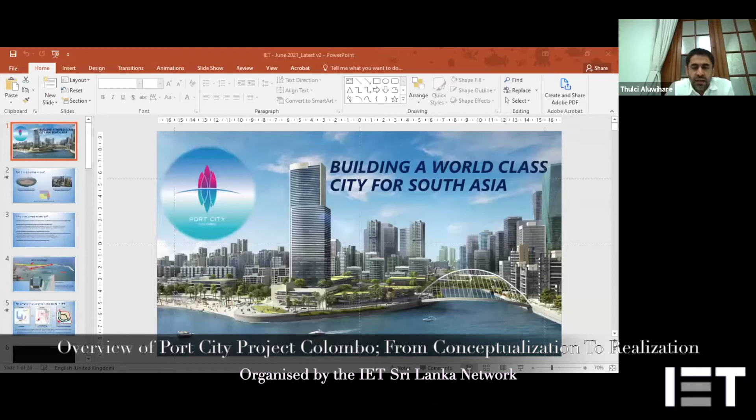So let me now try and share the slides with you. Can you see my slides on the screen? Great. So, building a world-class city for South Asia - this is really our vision.

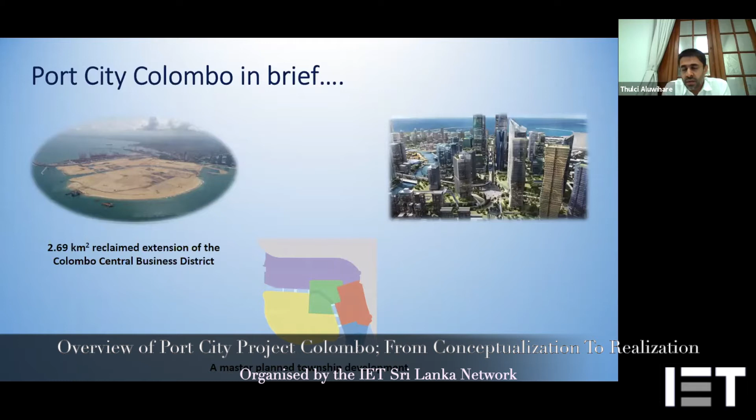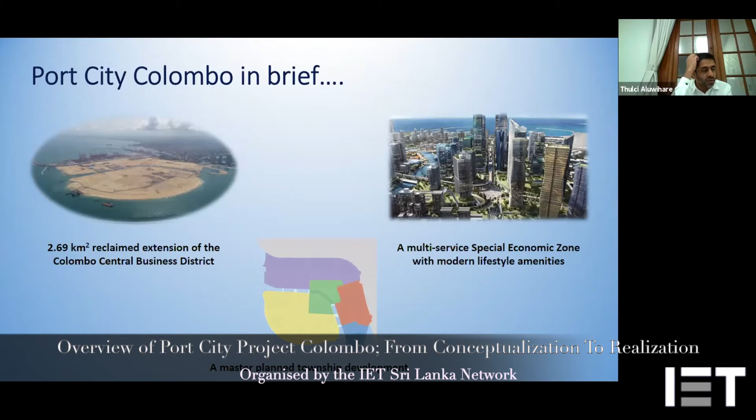This is Port City Colombo in brief. It's a 2.7 square kilometer reclaimed extension of the Colombo central business district. The whole 269 hectares of land is divided into 5 precincts, color coded, each resonating a different development personality. It's the first master plan township development in Sri Lanka - a multi-service special economic zone with modern lifestyle and amenity. The framework law for this was passed in Parliament and got certification by the Speaker last month. So now we are really ready to do business. I will discuss this a little bit more.

The next question is, why a reclaimed extension? As you all know, high quality real estate is crucial for businesses, investments, and to drive tourism demand. Now, if you take Colombo, due to limited land availability, doing a real planned city was a huge challenge. As you would know, land acquisition takes a long time and is a very costly affair.

Hence the option of reclaiming land from the sea was mooted much before the 2013 reclamation started. Reclaiming land from the sea and developing planned cities by the sea is not unique to Sri Lanka - many countries have done this over and over again. Some examples Dr. Lalit mentioned, like Palm Jumeirah in Dubai, are quite famous for this type of development. This is the first time Sri Lanka has reclaimed land to develop a city. We have done reclamation works to develop ports, but this is the first time we've attempted to develop a city.

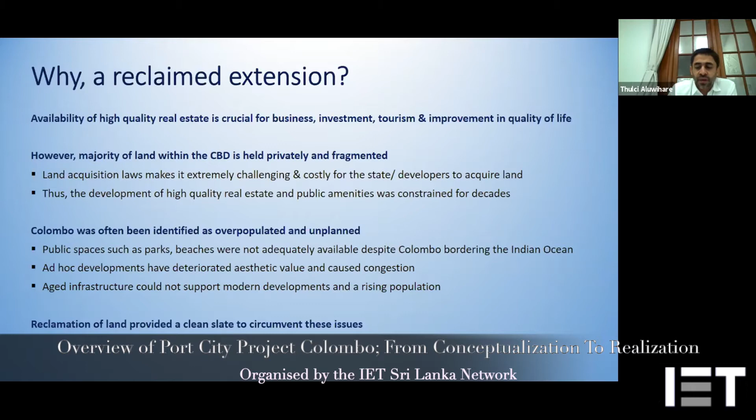What you can see here - let me move my cursor - this is the South Port development, that's a terminal. This breakwater was developed commencing in 2007, about 5.2 kilometers long. And if you look at this South terminal, there's about a 2 kilometer width here. So the Port City reclamation was really anchored to the South Harbour development project, and it made the project more feasible simply because this breakwater was already in existence.

Generally in Sri Lanka, the sand or sediment accumulation moves from south to north. Because of this South Port breakwater, a certain amount of sand was anyway accumulating there. Just to give you context on size, the South Port reclamation consists of about 820 hectares, compared to Port City which is about 269 hectares.

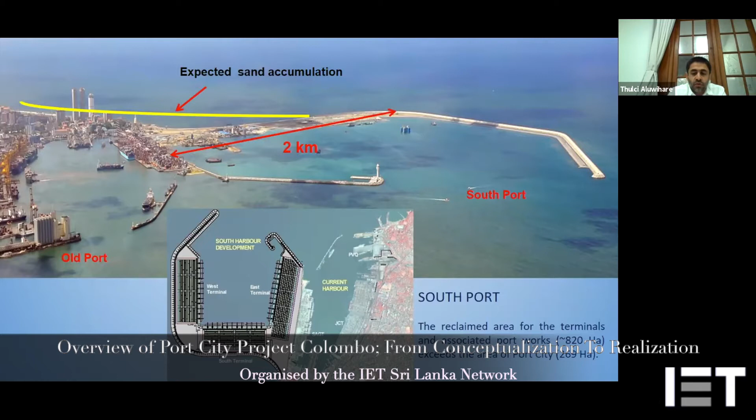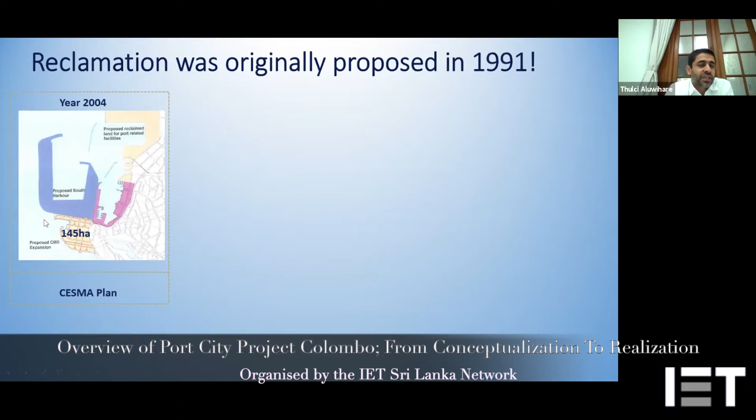This reclamation idea was conceived way back - initially a Singaporean company called CESMA proposed this in 2004. If you look at that chart on the left, at that time South Harbour was proposed with 145 hectares initially envisaged. That was in 2004. Then real feasibility studies and those conceptual thoughts were put into action in 2011, with initial technical feasibility studies conducted. At that time, the thinking was somewhere around 130 to 133 hectares for the reclamation.

This was subsequently increased to about 233 hectares. But what we've ended up having now is about 269 hectares, and that majority increase was actually due to an increase in public spaces - the parks, waterways, and beaches. So more common areas were added, hence the increase in land reclaimed from 233 to 269 hectares.

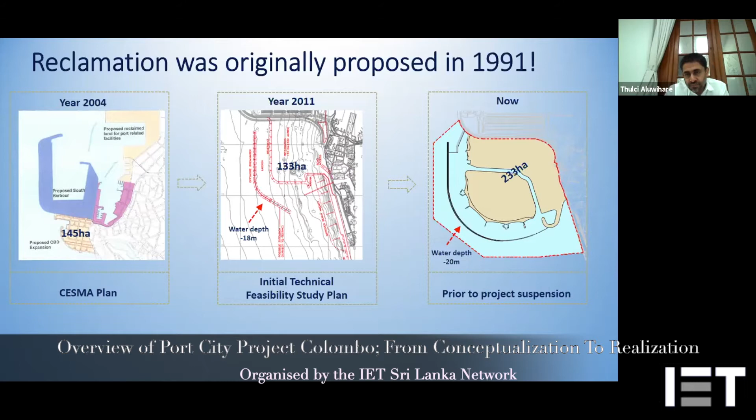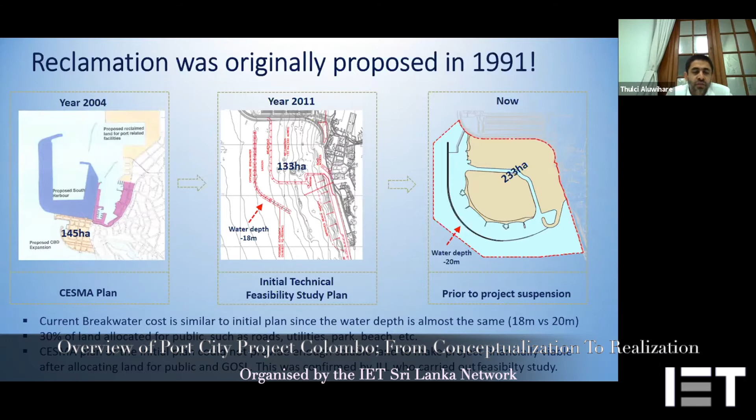As I mentioned, 30% of the land is allocated for public use. So 1/3 of Port City's 269 hectares is open to the public. This consists of parks, roads, beaches, and total green areas within Port City amount to about 27 hectares. Galle Face Green is about 5 hectares.

I want to play a short video now which will give you a description of how the reclamation process worked. I know most of you are engineers, so I'm sure you'll be quite keen and interested to understand this. Let me play this video, it's about a 4 to 5 minute video.

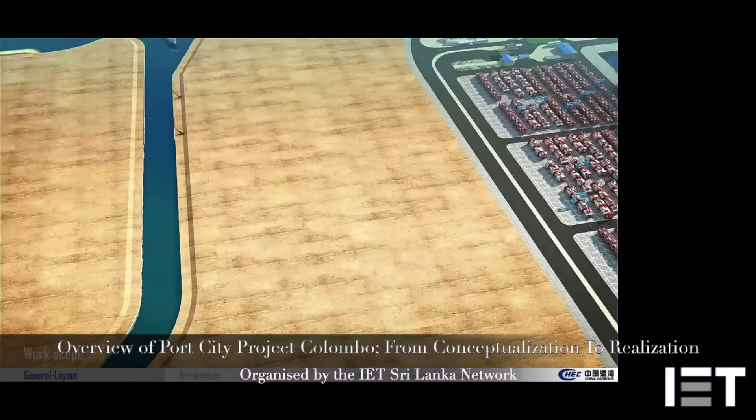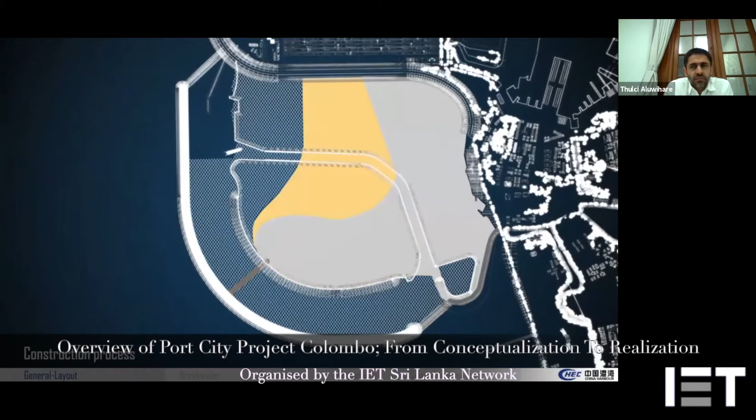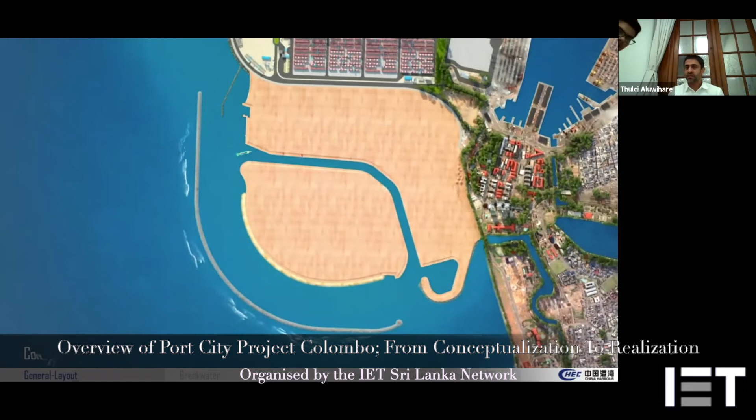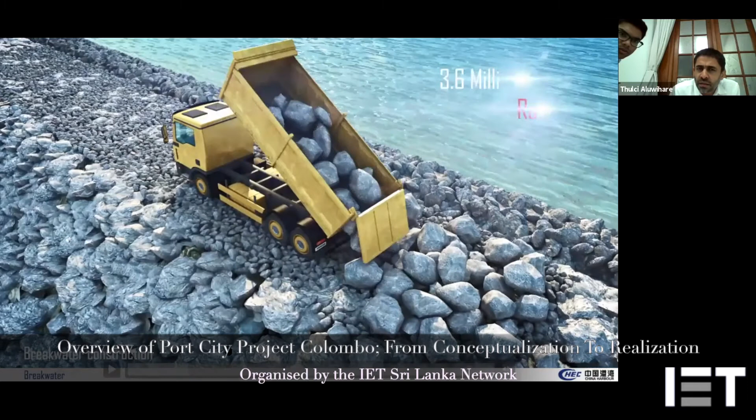Can you see the video now? Yes, Thulci. Lalit, you can hear the audio, right? No, no audio was heard. Wait, I think that's an issue. So audio has to be heard. Yeah, there has to be audio. One second. We can't hear the audio. Some are saying they can hear the audio. Okay, yes, now we can hear it.

If you play from the start, this project is a first stage construction project. The main activity is the construction of the land reclamation and its protection structures. The breakwater and revetment surrounding Port City provide protection against waves from the adjacent sea. The construction of the breakwater and land reclamation is synchronized and consists of 3 construction phases.

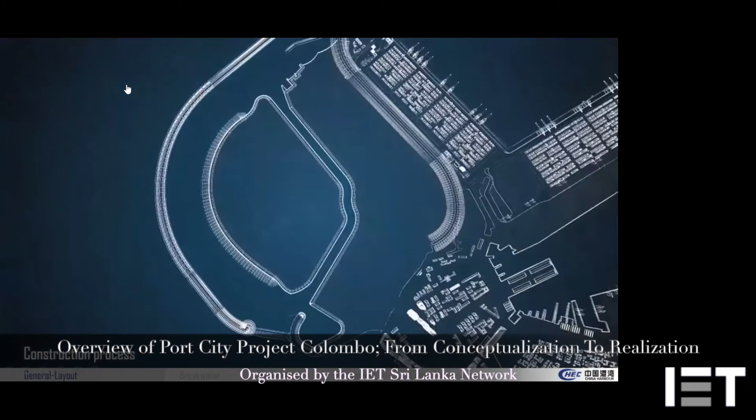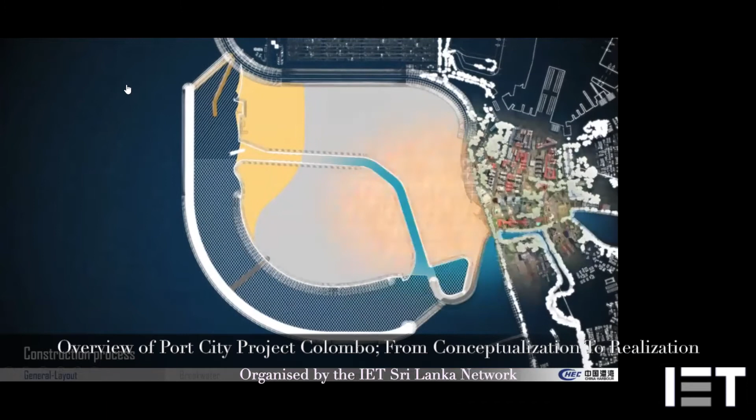During Phase 1, then in Phase 2, and at the end of Phase 3, the construction of marine structures, land reclamation, and ground improvement will all be completed.

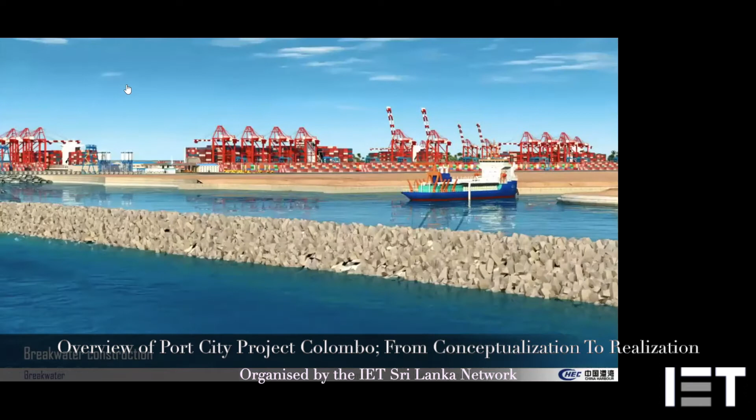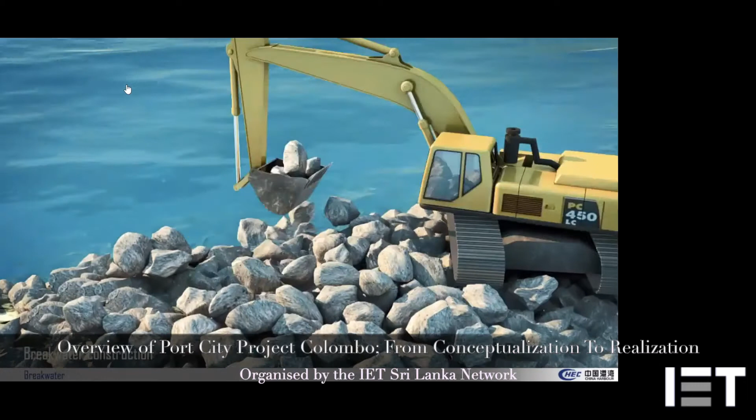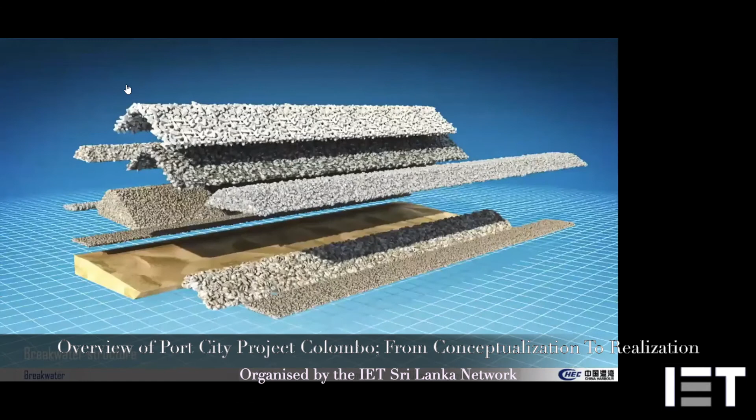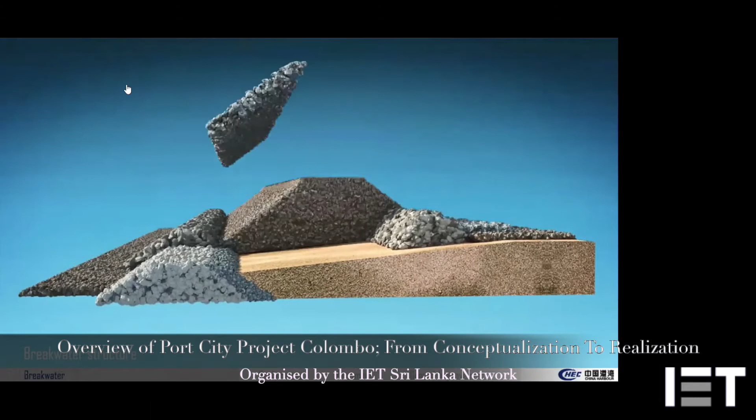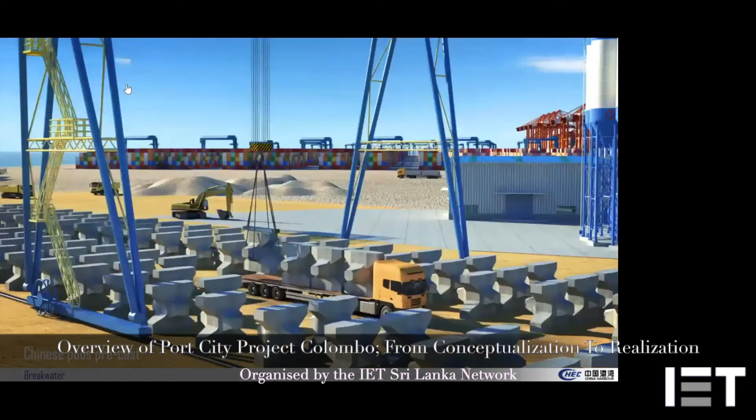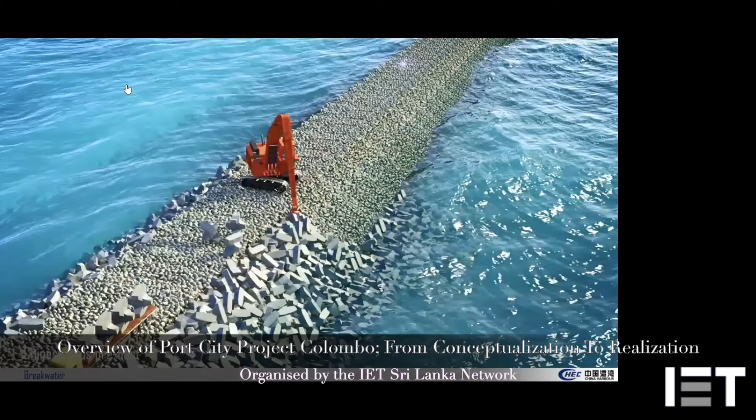The breakwater will be constructed by a combination of land-based and waterborne equipment. During construction, placement of rocks and concrete blocks is supported by large-scale GPS excavator computer-aided systems. After casting in the precast yard on site, the Chinese pods are lifted by large-scale gantry cranes onto transportation vehicles and transported to the storage area on site. Thanks to the adoption of heavy-duty long-reach excavators and world-leading high-definition real-time imaging sonar, the installation of 42,000 Chinese pods can be accomplished.

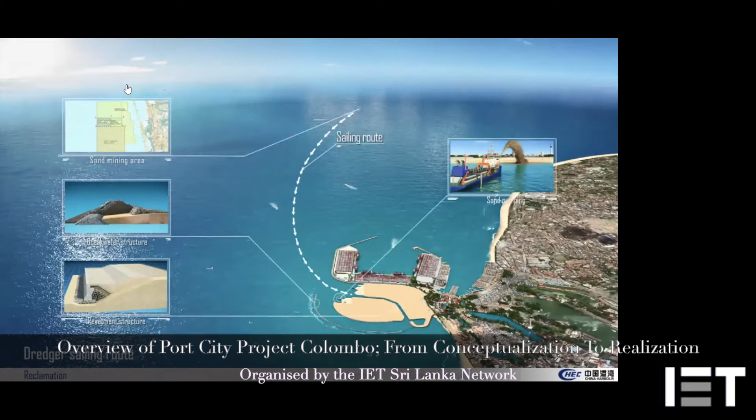Total reclamation works include 269 hectares of land reclamation, sand core at the breakwater, and other sandfill work. Dredged reclaimed sand comes from the appointed sand borrow area in the northwest of the project, with an average transportation distance of 25 kilometers. Sand filling is carried out by the world's most advanced ultra-large self-propelled trailing suction hopper dredger, Junyang-1.

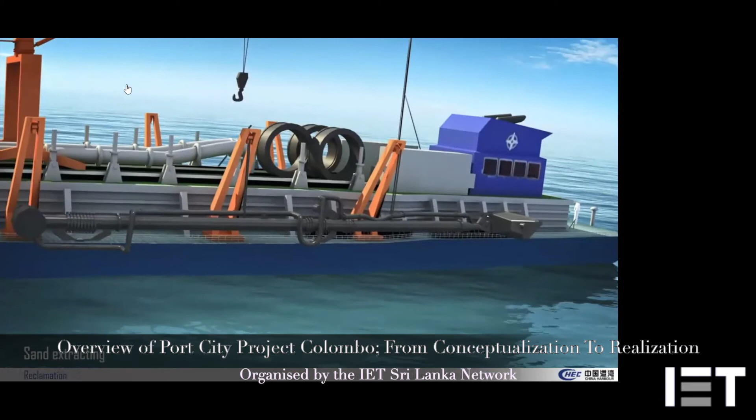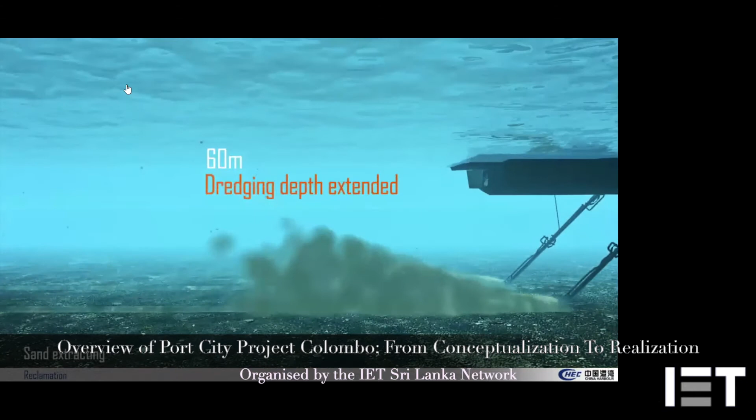Junyang-1 is 167.5 meters long, with a full load draft of 11 meters. The maximum dredging depth which can be reached is 60 meters. Its hopper load capacity goes up to 21,028 cubic meters. The dredging operation to fully load the hopper can be completed in around 1 hour.

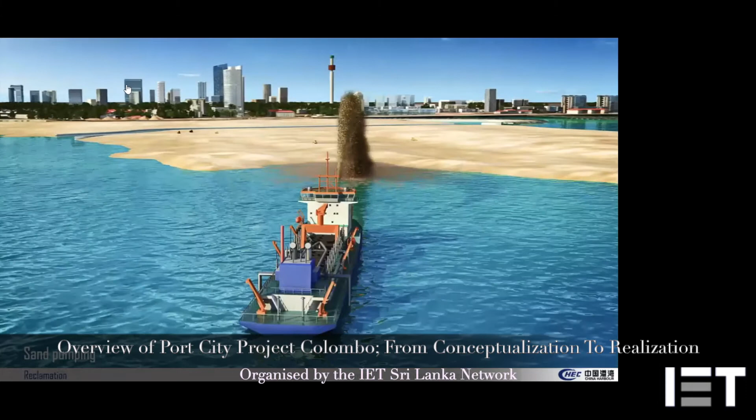Junyang-1 is able to complete the sand pumping process in approximately 1 hour. By using various construction methods such as rainbowing, dumping, and bow dumping, 71 million cubic meters of sand backfill will be accomplished.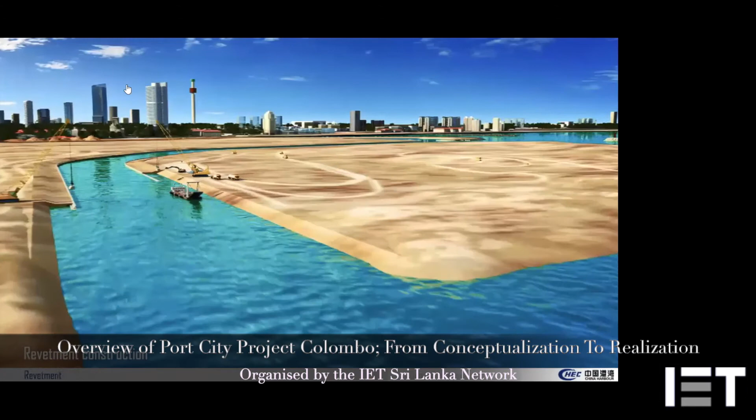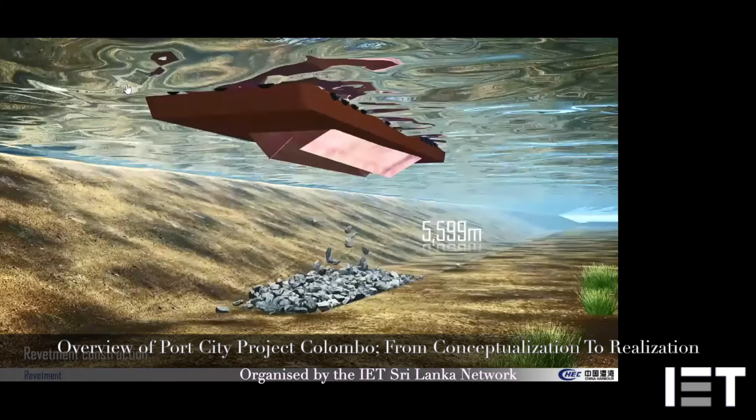The canal seawall is located in the center of Port City. It's 5,599 meters long and 70 meters wide, running through the city from northwest to southeast. Besides facilitating water exchange, the revetment structures also provide a beautiful landscape.

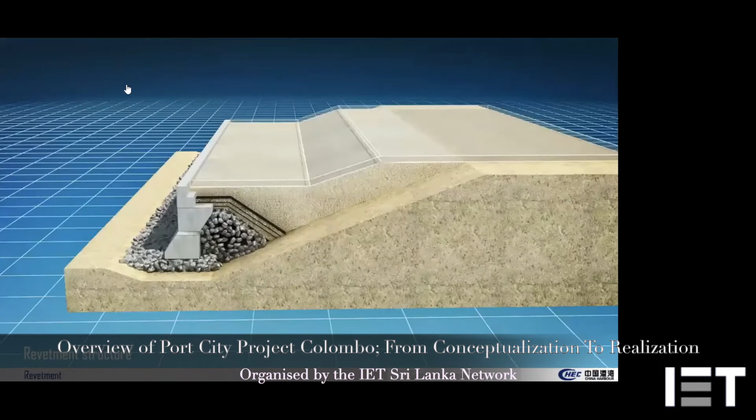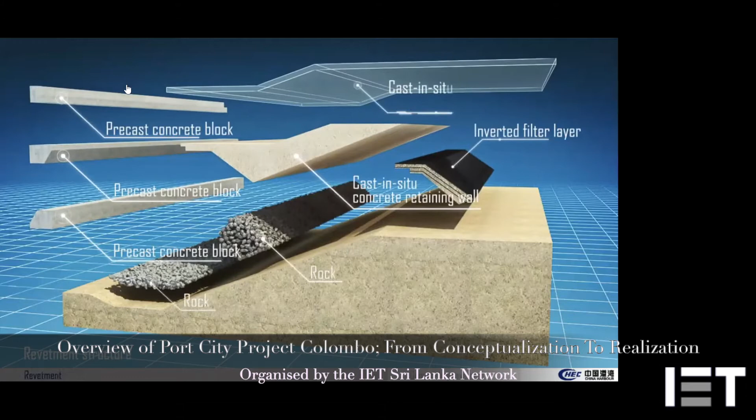The seawall is designed as a vertical block structure. The structure consists of precast concrete blocks and a cast-in-situ concrete crown wall. The blocks are placed on a rubble mound stone foundation. Riprap and filter layers are used as backfill materials behind the blocks.

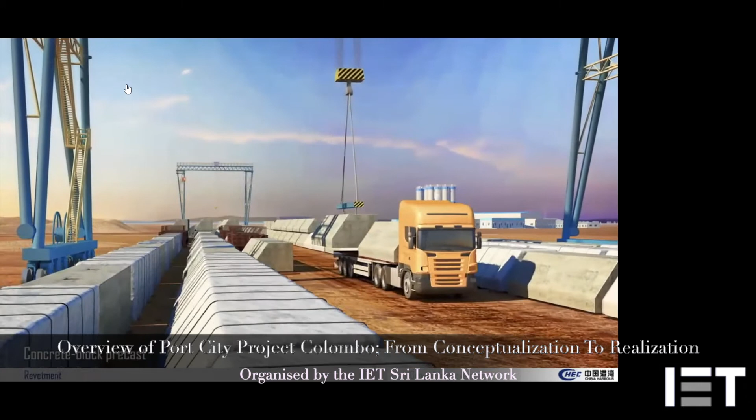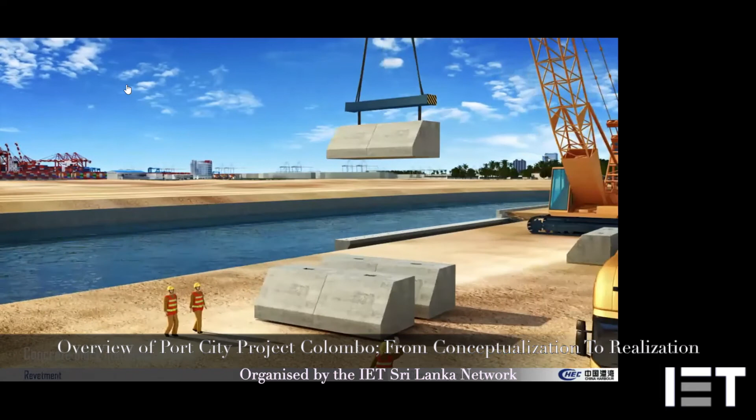The first step is to precast the concrete blocks in a large precast yard using advanced integral open-close concrete formworks. An information management and monitoring system is adopted throughout the concrete production process. The seawall is designed in a beautiful curved shape, with up to 179 types of blocks used in the structure.

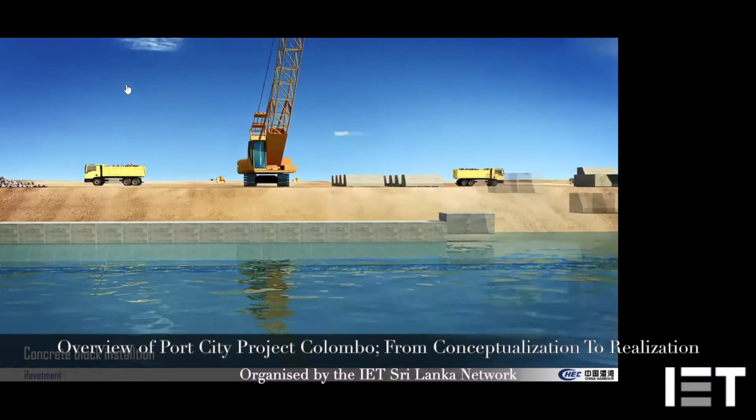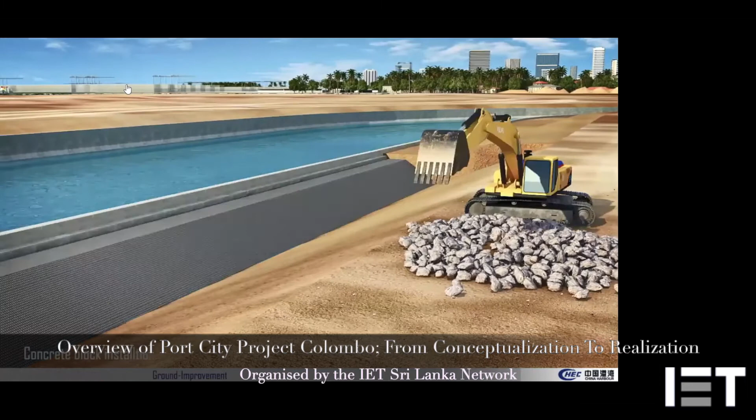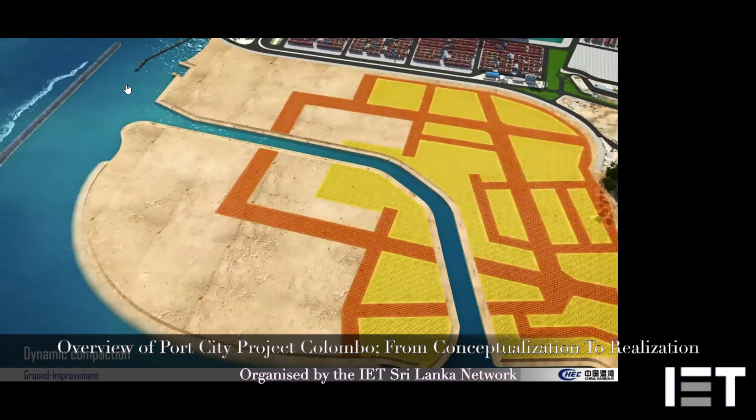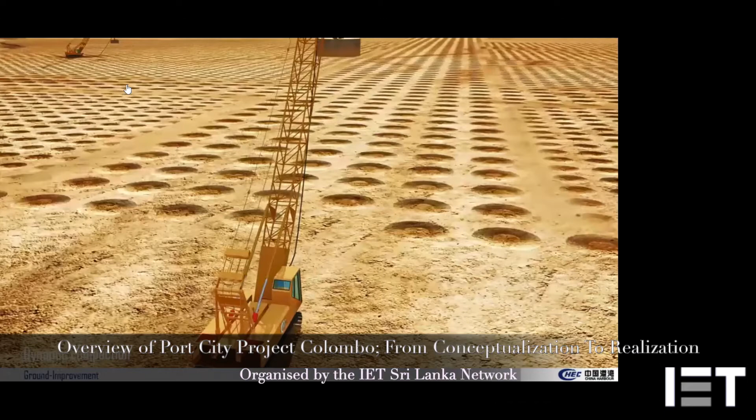According to the development plan, the area for ground improvement in Phase 1 is 159 hectares. Two main methods, dynamic compaction and vibro compaction, are adopted. Dynamic compaction involves densifying deep loose soil deposits using a large amount of tamping energy.

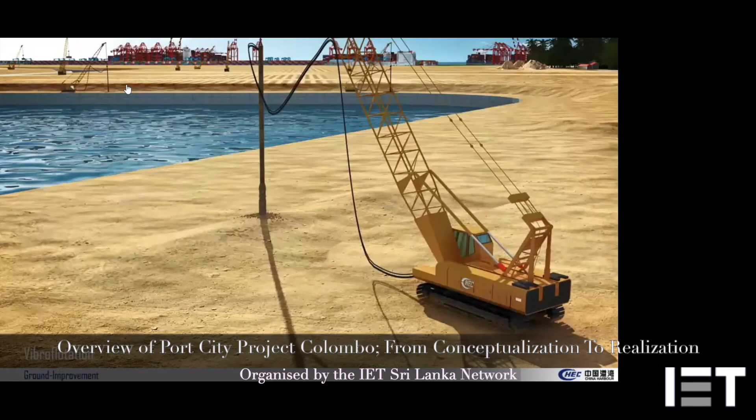Vibro compaction: by the strong vibration of the vibroflot, the sand particles can be rearranged and the void ratio can be reduced, which significantly improves the bearing capacity of the barren ground.

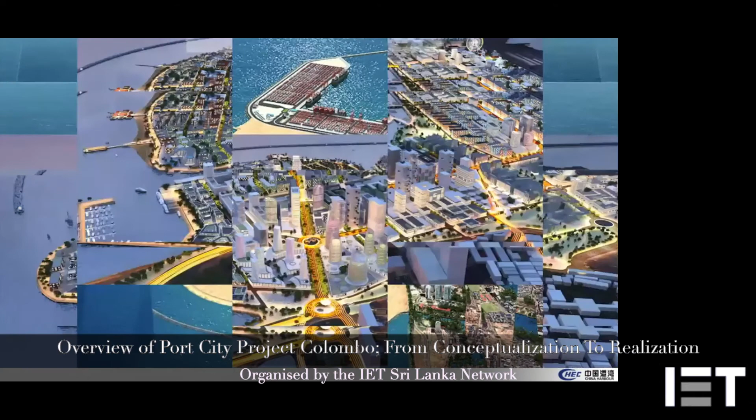Port City Colombo is the largest foreign capital project invested by China Communications Construction Company Limited. It will be the catalyst for growth of Colombo, a place that fuses the finance and energy of Sri Lanka and the most promising financial center of South Asia. The Phase 1 construction will lay a solid foundation for the future development of Port City Colombo. We will all be witnesses to the rising and booming of this international city of a bright future.

Hi, can you hear me? Yeah, it was a very good video. Thank you, I thought it might be quite useful. As you can see, it's really an engineering marvel with a lot of technical input. Second, sorry.

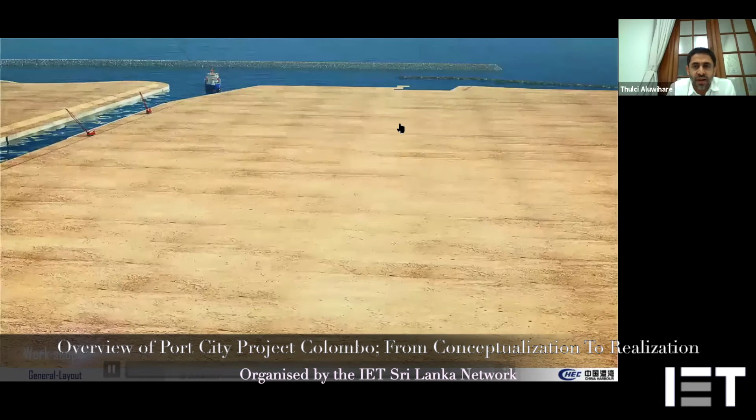With a lot, it really addresses our engineers' expectation. Thank you, and also the technical know-how of these reclamations. Chinese have done it many times over, so they were really the experts in this field.

Now, if you look at the Hong Kong airport, for instance, that's about 1,300 hectares. That was done by the CCCC, the parent company of China Harbour. Okay, I hope you enjoyed that.

Let me move on to touch upon, I think Dr. Lalit also mentioned about the project being suspended. So certain variations, since the project's initial inception was in 2013, and when the project was suspended, one of the concerns was that the terms of the project were renegotiated as a public-private partnership.

As you would know, in a public-private partnership, the risks and rewards are separated between the public sector, which is the government, and the private sector. Some of the responsibilities under the previous agreement with the government were realigned and allocated to the project company. For instance, getting all the environmental approvals under the previous Sri Lanka Port Authority agreement was a responsibility of the government. With the revised tripartite agreement, where Sri Lanka Port Authority is no longer a party, the agreement was with the Urban Development Authority, at that time the Ministry of Megapolis, and the project company. Under the tripartite agreement, getting all the environmental approvals now lies with the project company.

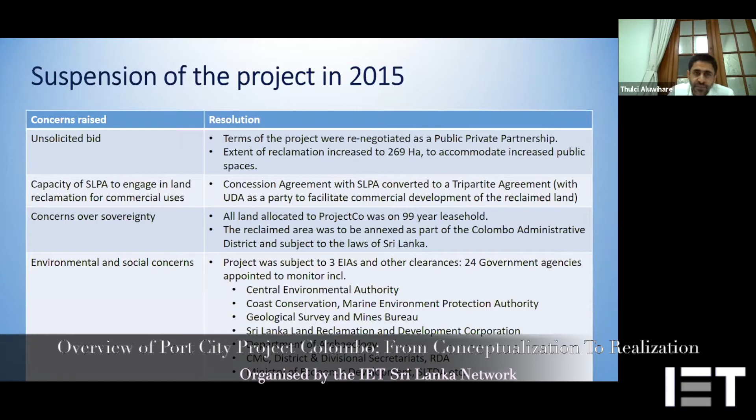So on the environmental impact assessment, as I said, we did 3 rounds of EIAs. The second EIA, which we call the supplementary EIA, when it was done, we received over 215 written submissions because the environmental impact assessment was made available to the public for 30 days. Following the due process, we received over 215 written submissions. We had an expert panel, and some of those were taken on board. For the 3rd EIA also, we received a certain amount of written submissions.

For reclamation, there was a license issued, and that license has 72 conditions. Now, how do you make sure those conditions are adhered to? We have what is called the Environmental Management Plan. Under the EMP, we need to demonstrate that these license conditions are strictly adhered to. On the 3rd EIA, for the vertical development, a similar process was followed, a license was issued with about 56 conditions, and similarly we have an Environmental Management Plan to ensure adherence to those conditions in the license.

Also need to ensure that even the dredging was followed with international standard. There were certain 3 sand borrows identified away from the shores of Colombo, about 15 to 30 kilometers distance. This dredging activity took place there.

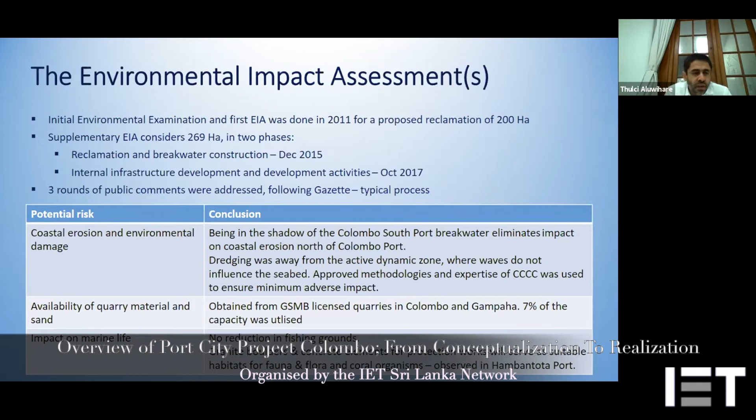Another 150 to 175 thousand transient population - people who will come to Port City for work, leisure and other purposes. Based on population growth and our development plan synchronizing, we were able to understand what is the utility requirement within Port City.

So we have built for potable water about 39,000 cubic meters a day, with storage tanks designed to do that. But the requirement at peak, when the whole Port City is developed in 2040 or 2041, is about 25,000 cubic meters per day. So we are well within that requirement.

On the electricity side, the total power generation requirement is about 360 megawatts, but we have designed our capacity to close to 390 megawatts.

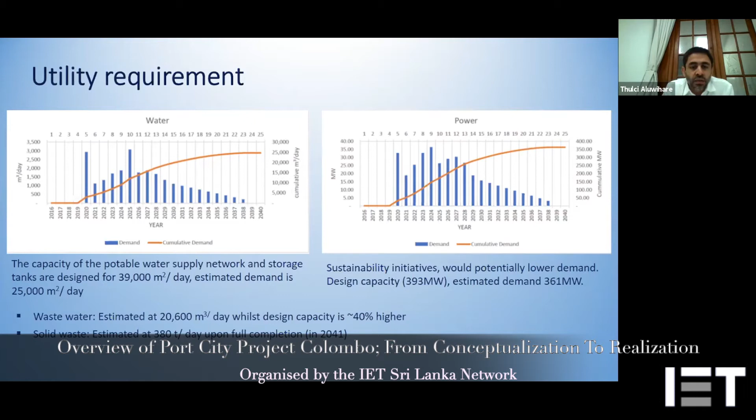Now the question is, yes, we have developed this internally. Does the national grid have adequate supply to meet the demand of Port City? If you take a utility like power, for instance, the total requirement, as I said, about 360 megawatts, is about 8.5% of the installed capacity.

Now, as all of you may know, there are certain concerns about our ability to provide uninterrupted power supply. The issue has been that as a country, we have not managed to stick to the long-term power generation plan. So when that happens, obviously there is a constraint.

However, based on the existing capacity we have for the next 10 years, we are quite comfortable that the national grid can supply the required demand of Port City. However, beyond that, it is important that the government really deploys and commissions some of these power projects.

As I understand, they are planning about a 600 megawatt LNG project. Of that, 300 megawatts have already been commissioned by Lanka Transformers. I think for another 300 megawatt LNG, they have called for EOIs. In addition, there are huge plans by the government to also use renewable, unconventional energy sources as well.

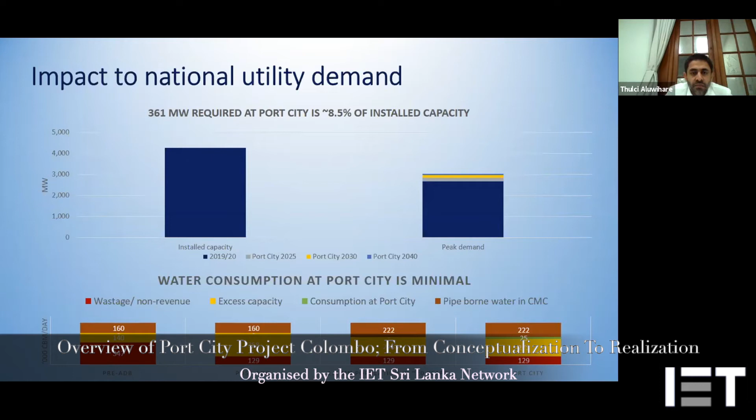It's good to really discuss the arrangement between the Sri Lankan government and the Project Company, which is the special purpose vehicle incorporated to develop Port City. The land reclamation and all infrastructure development, the envisaged investment, is now increased from 1.4 to 1.5 billion, to be done by the private sector project company. In return for that reclamation and consideration, Government of Sri Lanka will give a leasehold right to the project company for 43%, that is about 116 hectares, to monetize.

I want to emphasize that we will not be putting up buildings and developing on all 116 hectares ourselves. In fact, the majority would be called for investment by international investors. We may develop a few initial plots to instill confidence and attract the required foreign direct investment, but the majority of that 116 hectares would be developed by international investors and developers.

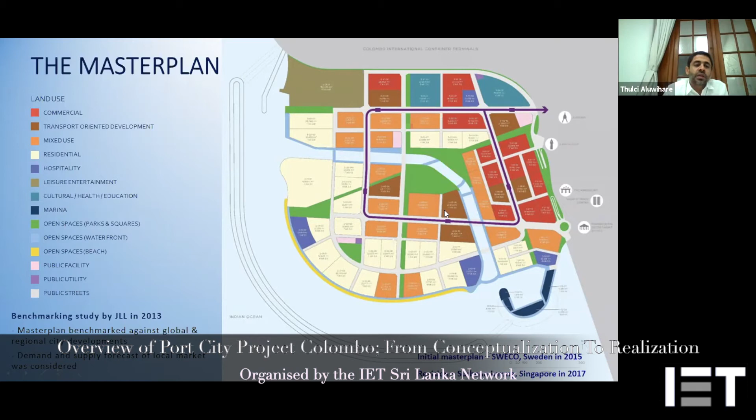If you look at the master plan, the west half is majority phase 2, which is light colored, and that's for residential developments. Phase 1, adjoining the existing Colombo CBD, shown in darker colors, is predominantly commercial development, meaning office towers. Trade and commerce need to happen, and we need to succeed in creating a vibrant business city in order to attract demand for phase 2, the residential area.

A noteworthy point is that the Engineering News Record, ENR, a US firm, awarded Port City the best project last year in September 2020. We have also won many other awards, including the Singapore Landscape Architectural Award in 2017.

If you look at this master plan, there is high density with high rises more towards the existing CBD area, and as you move towards the new shoreline, it's low rise, low density. This ensures that air circulation and the view of the sea are not disrupted. In developing this master plan, ventilation principles, the local climate, and continuous green and blue linkages have all been taken into consideration.

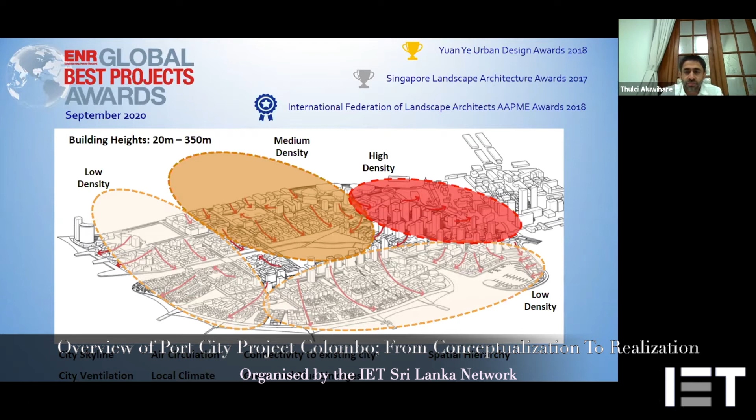There is what is called the development control regulations. For each of these 74 plots, any developer who wishes to develop has to adhere to these best-in-class international guidelines. It has 4 chapters: one on urban design, covering the use of the plot, the floor area, the building height, and the plot coverage.

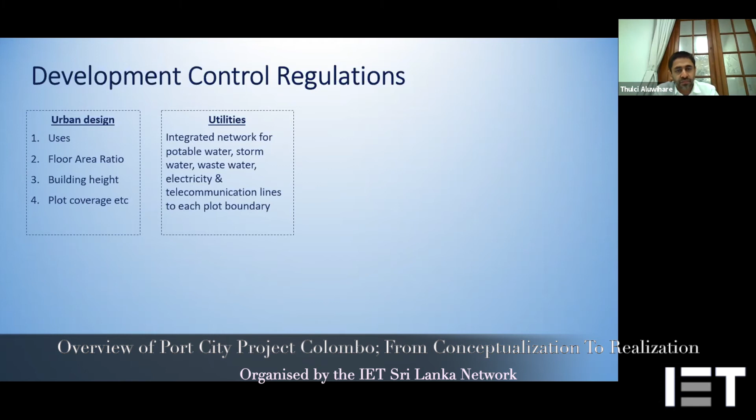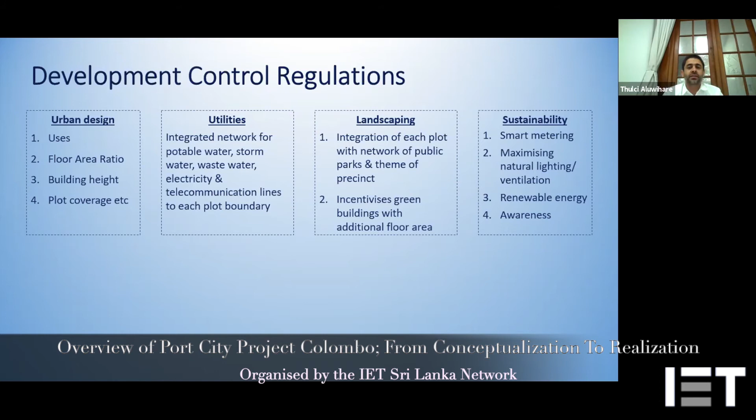There's one chapter on utilities, and landscaping, which has mandatory landscaping requirements within each plot, and importantly, one on sustainability. So for each of the 74 plots, there are detailed guidelines on all these 4 aspects that developers need to strictly adhere to when developing or constructing within Port City.

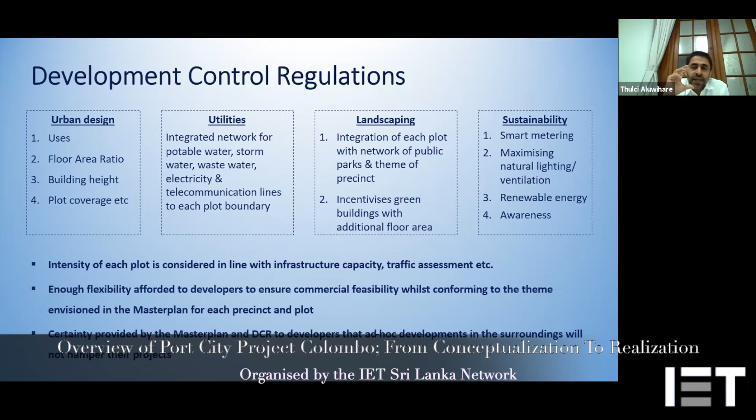What's important is that there's enough flexibility given within these guidelines so that commercial developers can vary somewhat, but we need to ensure the aesthetics of Port City remain. All of you will agree that ad hoc development took place in Colombo, causing significant limitations. The idea is that when a developer makes a financial commitment to invest in a plot, he needs to be assured that his view won't be disrupted by an adjoining building approved subsequently after his investment. So we ensure certainty is provided through this master plan and the development control regulations.

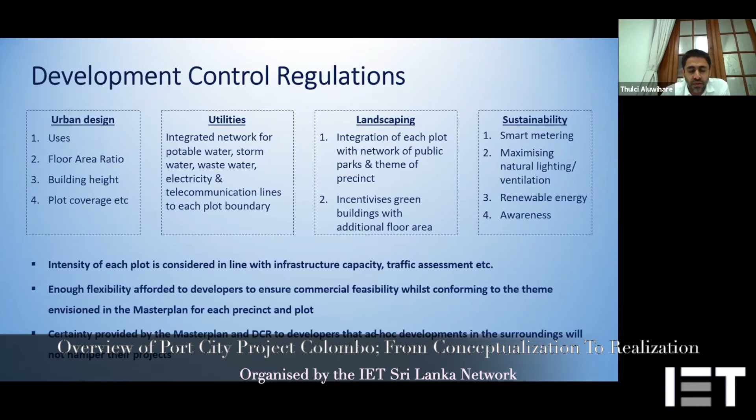More importantly, as you would have seen in the video, there's an internal salt water channel, about 5.5 kilometers or 5,500 meters long, with a width of about 70 meters. Along these internal water channels we'll have F&B offerings, beautiful promenades, and retail offerings, and also an inland taxi service implemented within Port City, where you can take a taxi from the northwest and come down near the marina along the internal water channel.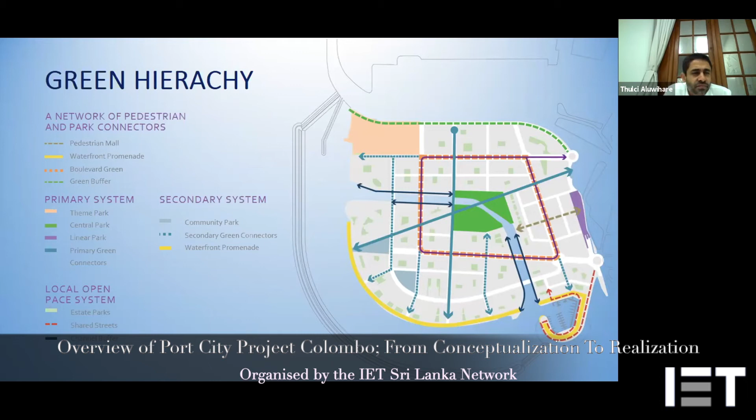The transportation plan within Port City is also quite important, and we gave much thought to it when developing the master plan. In an average city, personal vehicles get priority, and cyclists and pedestrians have the lowest priority, whereas in Port City it's the inverse. Pedestrians and cyclists have been given utmost priority, with dedicated walkways and dedicated cycle lanes. What we're promoting is really a pedestrian and cyclist-friendly city in Port City, and promoting public transport.

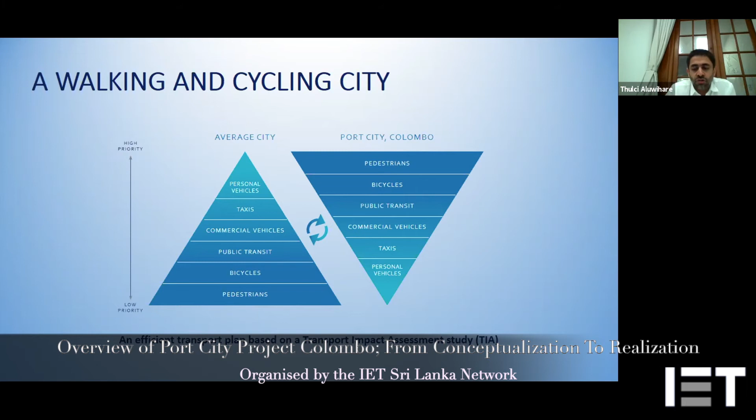This is the cross-section of the main boulevard. As you can see, there are dedicated tree planting, dedicated cycling lanes, shaded walkways, and also provision for an elevated LRT.

As you may know, the government has suspended the proposed LRT project, which was going to be funded by JICA. So our initial plan was that one of those LRT lines, which will come to the Fort Multimodal Transport Hub, we will get an extension and draw a line from that LRT into Port City.

Now we just need to ensure things work if the LRT is not happening anytime soon. Anyway, there is no immediate requirement for us to have an LRT, because we will not have that population, I'd say, in the next 10 years. But I'm quite sure that in the near future the government will roll out an LRT or another feasible public transport system, and we will ensure that system is integrated with the Port City transportation plan.

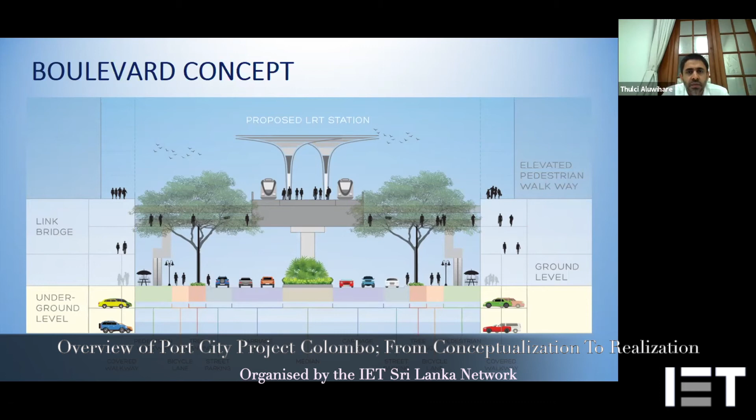This is the project timeline. We are here at the moment, in 2020. So most of the internal infrastructure works - the parks, the roads, the main boulevard - will all be completed, majority by end of this year and some by mid next year.

So you will be able to patronize the park and the beach before mid next year. And we expect to complete the marina by 2023 - the first internationally branded yacht marina in Sri Lanka, by 2023.

And we have what is called social infrastructure, which is the hospital, the school, and the convention center. We hope to complete all that by 2025, including some hospitality development. And the total project timeline, our best estimate at the moment, is 2041. Now, this is not cast in stone.

Why I say that is it depends on how well we can position Sri Lanka to attract investments. Now, if our sales velocities were as high as Dubai's 10 years ago, I am sure we might be able to complete this project much earlier than 2041. However, if we fail to attract the right type of investors - global investors - obviously this timeline may even extend beyond 2041.

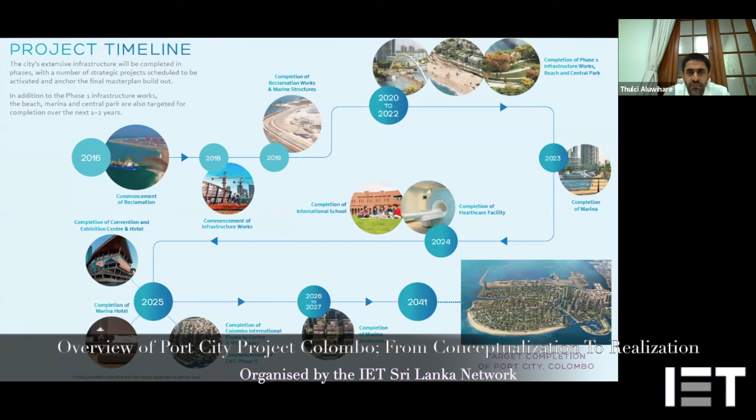A quick progress update - I think these are some of the pictures of how it looks.

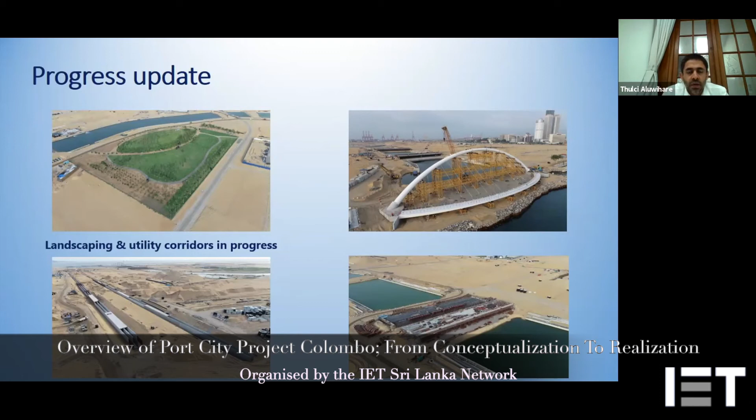So landscaping, all utility corridors - there are underground utility corridors being developed, a utility service corridor being developed. These are real futuristic ideas where you don't have to really dig up the road every time you want to lay a pipe or make a repair. So there are dedicated, separate service tunnels for utility works.

So of the 1.4 billion initial committed investment, 1.1 billion has been invested thus far. I want to emphasize that this is foreign direct investment. There was no loan from the Chinese government to the government of Sri Lanka - it's purely on a commercial basis. The project company has made this investment.

Port City was also declared under the Colombo Administration District in August 2019, and as I mentioned before, 3 rounds of EIAs were done. As we speak now, 100 hectares of land is ready to be monetized, ready to attract investment, ready to be constructed. And more recently, the Colombo Port City Economic Commission bill was approved - it is now law, and a 7-member commission has now been appointed.

Now, in addition to the horizontal development, the project company has made a further commitment of another $1 billion to do vertical development. This was quite important, especially post-COVID, to instill confidence. We have come forward to invest a further $1 billion in 2 phases. Phase 1 was about $460 million, a mixed-use development for which we will break ground before end of this year or early next year. You will also see a downtown duty-free store - the first downtown duty-free store - being opened by end of this year or 1st January 2021.

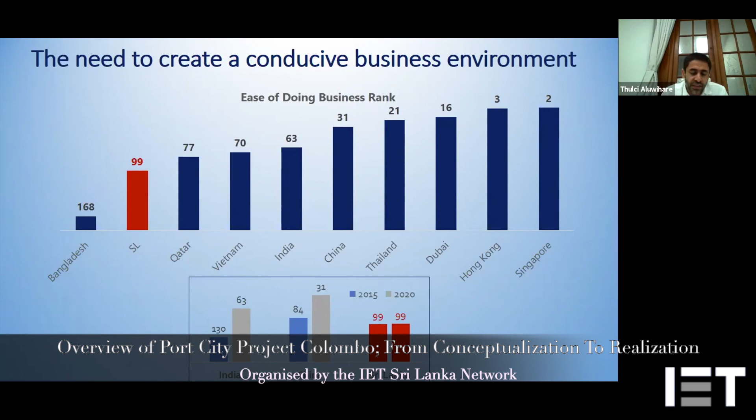So we needed to have really a paradigm shift in governing this city, and have very attractive, competitive, business-friendly laws and regulations to really attract investors and businesses to come and set up here. So this is where the Port City SEZ Act comes into play.

I must emphasize that this is only a framework, only an enabler for this law to be operationalized. Further regulations would have to be drafted, and I think that is the first task of this 7-member committee that is being appointed.

Some of the key features which have been a limiting factor in doing business in the rest of the country have been addressed through this Port City law. So foreigners can own up to 100% of a business, and there is expeditious dispute resolution.

In Sri Lanka, typically to enforce a contract, it takes close to 3.5 to 4 years on average. So no foreign investor is really going to come and do business if they are not able to enforce their contract. So there is a dedicated international dispute resolution center envisaged in the law, which will be set up within Port City to hear any commercial disputes.

One of the key limiting or risk factors for foreign investors has been the foreign exchange risk. Because if you look at our rupee depreciation, in 2015 $1 was about 145 rupees. As you know, now it's gone beyond 200. That's close to about a 35% depreciation of the rupee.